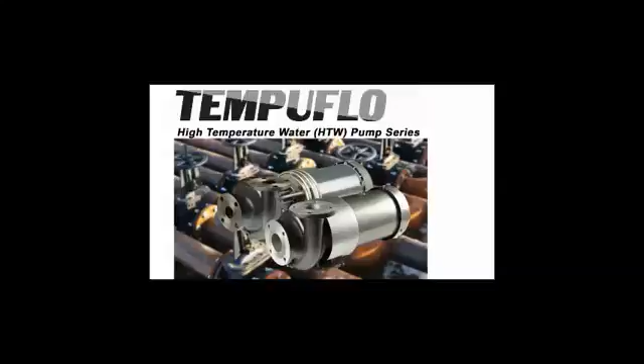The HTW was released by engineering in 2015, just recently. The pictures you see here are the first production run of the HTW pumps. The picture you see there on the left is without the shield. This is showing you the heat exchanger coil. This is the one major piece that makes the HTW possible. The picture on the left shows the HTW 80, and the picture on the right with the shield actually shows the HTW 300. These are, again, the first production run of this series of pumps, the HTW expanding the Tempuflo line.

This heater coil that we'll show in greater detail later is taking water from the sealed chamber and it is circulating it around the heater coil and back into the sealed chamber. We'll explain this in greater detail later, but I just wanted you to be aware of what you're seeing here.

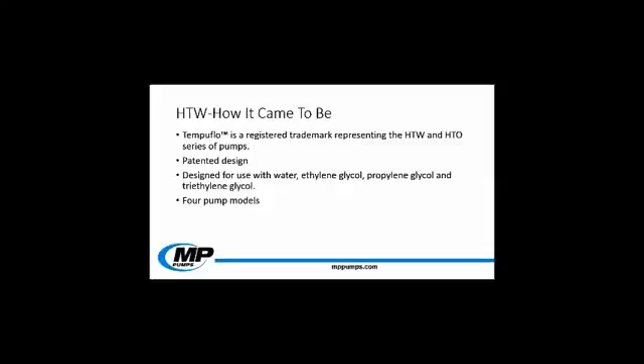The Tempuflo is a registered trademark. It is a name that we came up with here to describe our series of pumps, the HTW and the HTO line of pumps. The HTO, which you already are familiar with, the hot oil pumps, and the hot water pumps, the HTW pumps. Here at MP Pumps, we did patent this design. Several of the features, not only that heat exchanger coil that you've seen earlier, but several other design features inside this Tempuflo family have been patented.

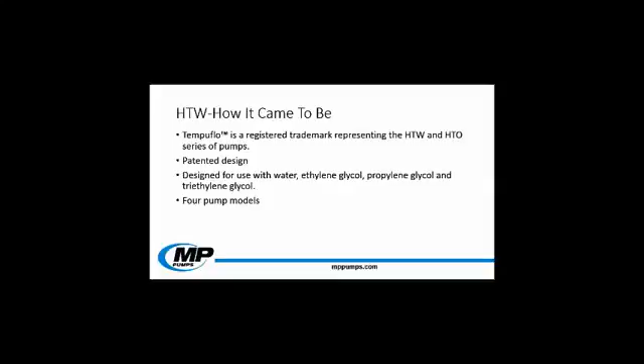Now, we don't want to limit the use for this pump, but specifically when we were designing this series of pumps, the HTW that is, we designed them for use with water, ethylene glycol, propylene glycol, and triethylene glycol. These pumps come in 4 different distinct models. The HTW comes in 80, 120, 180, and 300. The 80 and 120 both come in 2 different models: the NPT and the flat flange.

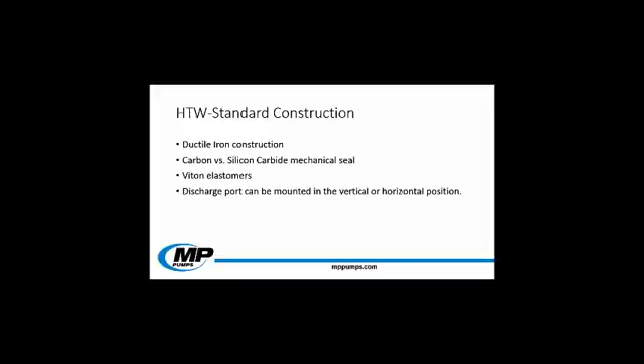This has a very durable design. It comes in the standard ductile iron construction. Also, it comes with our severe service seal. Our severe service seal has the materials of carbon and silicon carbide for the mechanical seal, and the O-ring seals are Viton elastomers. As always, you can change the orientation of the discharge on these pumps, from a vertical or a horizontal discharge position.

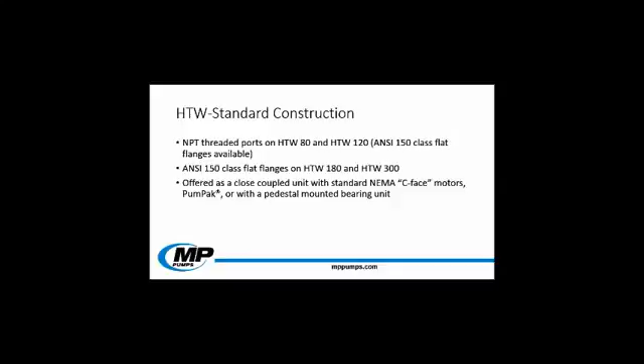The HTW line of pumps is self-aligning. It's self-aligning in that you don't have a long coupled design. The fact that it is close coupled gives you this self-aligning attribute. This is because of the close tolerances that are put onto the adapter and housing and impeller to allow it to be self-aligning. So with the long coupled unit, you'd have a bearing assembly and pump and electric motor that you'd have to align with a coupling. This close coupled design eliminates all of that.

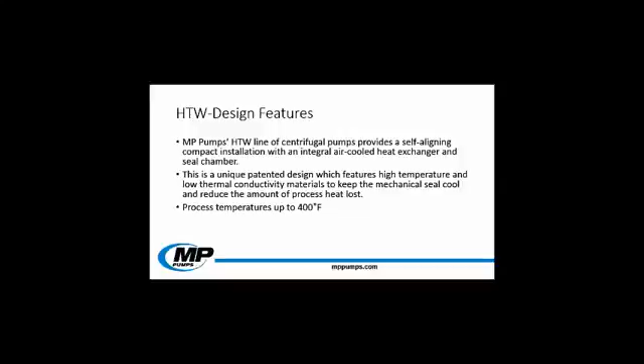This unique patented design, which features high temperature, low thermal conductivity materials, all of this combined with that heat exchanger coil is what reduces the amount of heat loss and keeps the bulk temperature in the main region of the circulation of the fluid that you're pumping and out of the seal chamber. With this series of pumps, we can process temperatures up to 400 degrees Fahrenheit.

But there's some other things that made the HTO line good as well. Like I talked about before, this is a close coupled design, meaning that the electric motor directly drives into the pump itself. And this is accomplished by these close tolerances on the adapter and the housing and all the other components that drive this concentricity.

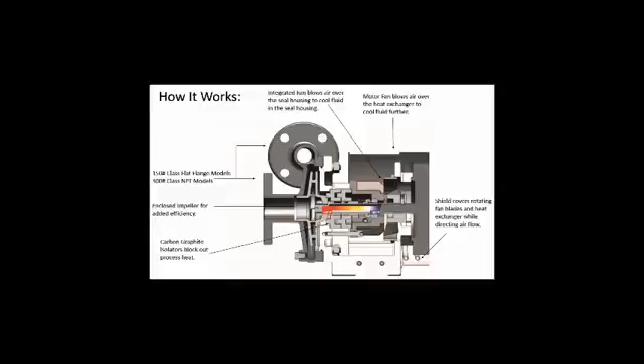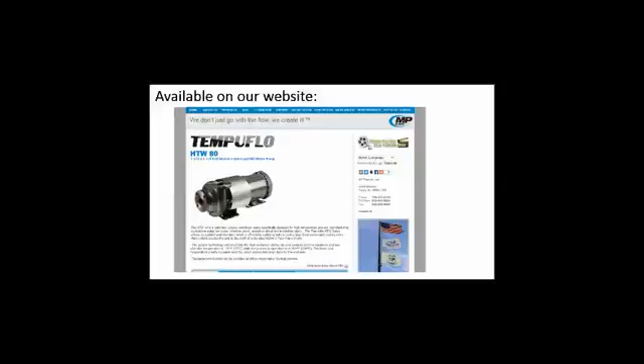You'll be able to see an exploded parts view of all the parts list in these series of pumps, and you'll be able to see all the information you need to know for this, as well as specs on the heat that it can take and anything else you need to see. If there's something you don't see here, please contact customer service and we'll be able to answer any questions that this does not answer.

This is an example of one of the things you can see on there, the installation print itself. This gives you the dimensions you need to hook this up to your system. We also offer 3D solid modeling for those that want to integrate a solid model into their 3D software for their assembly and for the designing of their system itself.

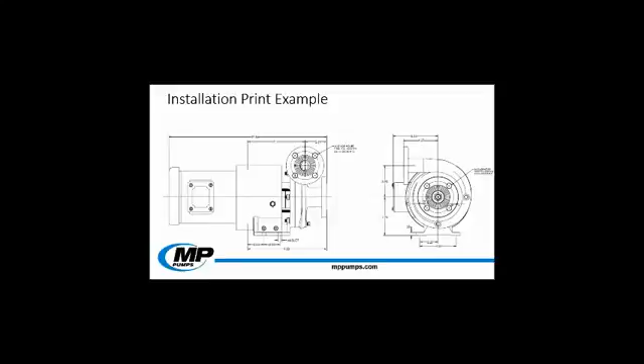What this curve is showing is all of the family of the HTW pumps. This is on a logarithmic scale, and so it goes up by a factor of 10. You can see here that it goes up from 1, 2, 3, 4, 5, 6, 7, 8, 9, 10, and so on by a factor of 10 every time. This was done so you could see all the family of pumps on one graph and keep it clean.

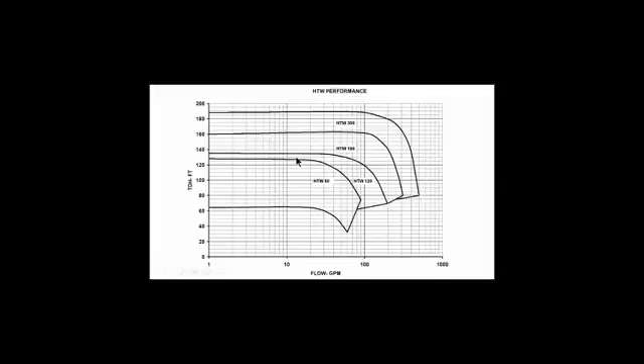This graph is used as a quick reference to see what pump best suits your need. This is flow on the bottom x-axis in gallons per minute, and pressure or total dynamic head on the y-axis. So once you establish where you need to be with your system, you can quickly figure out which pump best suits your needs.

This is a normal graph that you can see from a pump here. This is just one example. This is the HTW 180 pump, and the size is given in the top right as well. The HTW 180 has a 3-inch suction and a 1.5-inch discharge, and the impeller diameter is listed here as a 6.45-inch diameter.

Now this is a constant diameter curve, but it's what we call a multi-speed curve. When you lower the speed of the pump via a variable frequency drive, or if you have a 50 hertz application or a slower electric motor, this dramatically changes the pump performance, and that's what the multi-speed curve shows. As you change the speed, the pump performance will change.

As well as the last graph, this is still gallons per minute on the bottom and total dynamic head on the left. And the metric conversions are on the opposite sides. What this is showing, these curves are rather busy, but they're showing you pump performance on these curved lines. These curved lines that are going in this direction are the efficiency lines, and the constant horsepower lines are going in this direction diagonally. The opposite diagonal lines are your net positive suction head required lines.

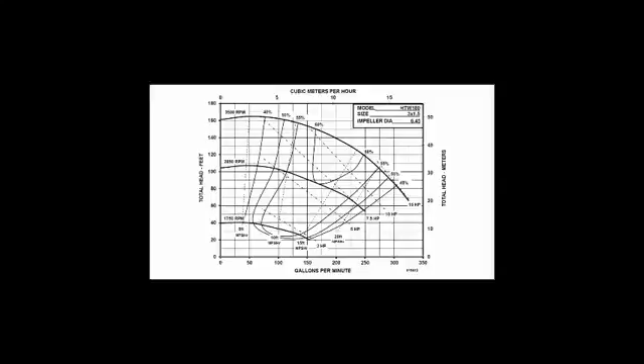This is just one example of a pump curve. We have pump curves for every model that we've seen before. What this curve is showing is the performance you can expect from our system from taking the bulk temperature into our seal cavity temperature. The bulk temperature, or the temperature that you'll be pumping in your system, is listed on the x-axis on the bottom in degrees Fahrenheit.

The y-axis, on the other hand, is what you would expect to see if you had a temperature gauge in the seal chamber itself of the seal temperature in degrees Fahrenheit as well. So for a given bulk temperature, what is the range I can expect to see depending upon factors of what my seal temperature will actually see.

And this range is based upon all of the HTW pumps, and they all have slightly different seal temperature performances at a given bulk temperature, and that's why you can see the range here, as well as varying performances as well. But this range shows that seal temperature versus bulk temperature.

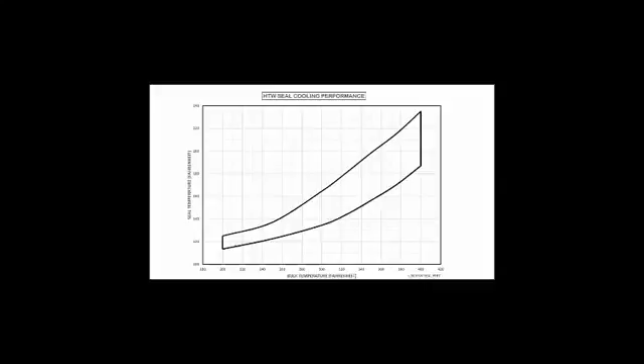What this is showing is the overall limitations of our HTW pumps. How high in temperature can you go, and how high of pressure can you go? On the x-axis we're showing temperature in degrees Fahrenheit, and this is the bulk temperature of your system, not the seal cavity temperature. And what can the bulk pressure be as well?

Each mechanical seal, depending on its size, has a limitation of maximum pressure that it can handle. The smallest seal can take the greatest amount of pressure due to its surface size. So the HTW 80 actually has the highest pressure rating at a given temperature that it can accept. So this is showing you the NPT version of 80. This is the 120 NPT, but this one curve, this dotted line, represents 80 and 120 for the HTW with the flat flange. And the flat flange is only offered in the 180 and 300, and that's the line you see here.

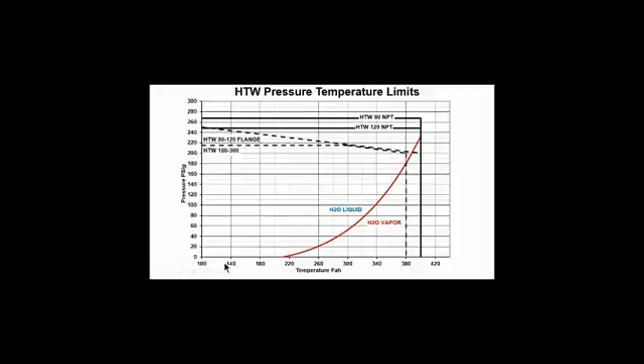This is just a quick chart, and it's a great chart. You will be able to have this available as well for you guys. This is just a quick reference chart, and what this is showing you is what are the general sizes that you can expect for each pump design, giving you the suction and discharge size, and then the size of the impeller itself. So you have the suction and discharge, and then the impeller, and what they're offered in as far as flange design on the housing.

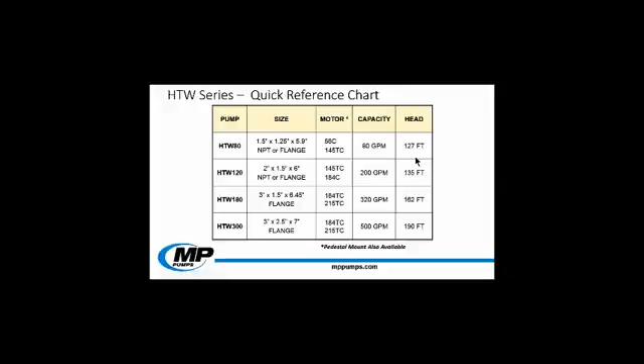Also, what electric motors can be hooked up to these pumps. And this helps especially when you're buying a pump pack design, and if you already have an electric motor on your shelf, this will aid in which pump will be able to hook up to that electric motor. And it also shows you the maximum capacity in gallons per minute and the feet of total dynamic head that you can expect out of each design.

Now, what are some of the benefits that you can expect from the HTW line of pumps? Like we said before, this has all the benefits that you're used to seeing with the HTO pumps. But with the heat exchanger added, this reduces the seal housing temperature to increase mechanical seal life. The cooler we can keep our mechanical seal, the longer it will last. And all these things combined, we've seen anywhere from a 60 to 80 degree change with the heater coil added.

We did a test where we actually valved off the heat exchanger while we were running and allowed it to maintain an equilibrium temperature. And then we turned it back on and allowed it to maintain an equilibrium temperature again. And this is how we've seen how effective this heater coil really was, because it really showed us, with and without flow through there, how effective we were with just the addition of the heat exchanger coil.

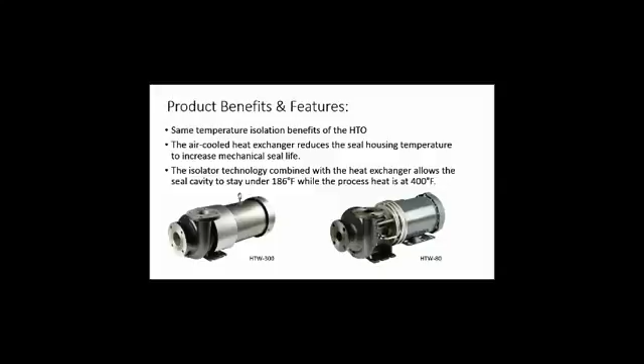So with this isolator technology combined with the heat exchanger, the seal cavity can stay under 186 degrees Fahrenheit while the process heat is at 400 degrees Fahrenheit in the bulk temperature. What these two pictures are showing again is the HTW 300 and the HTW 80, the first production models that we've created.

Now, what's the difference? What's setting us apart from the competition? The HTW pump is going to save you in water cooling cost. A lot of competitors' designs will actually have an external seal flush. This external seal flush is adding extra and unnecessary parts to your system, and that extra water going through your system could lead to calcification in your plumbing itself. All these cooling water costs, plus the bill of having the extra water being pumped through the system, are all eliminated with the HTW design.

This is an efficient design with the enclosed impeller and everything being close coupled. It is a very efficient pump, and so this will mean less energy costs for the consumer as well.

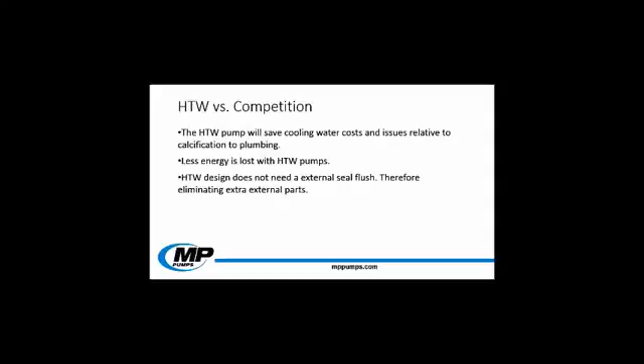Another benefit of having this close coupled to the electric motor is that it does not need an internal bearing. The internal bearing is needed by some of the competitors because of how long their overall system is, and they need to hold up the opposite end of the impeller. The HTW design is a very compact design and does not require this additional bearing, and therefore is one less part in the system to fail. And so this is a very efficient design as far as floor space and the elimination of the extra wet bearing in the competitor's design.

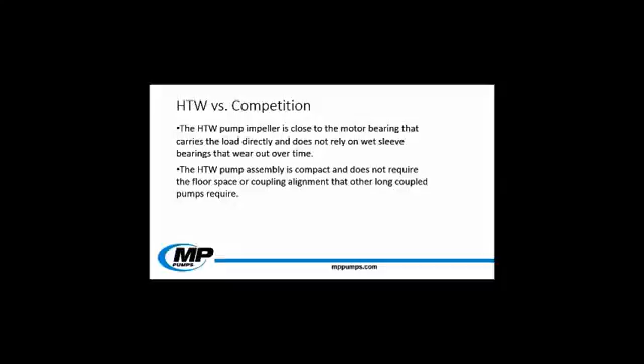Now, what are some of the applications for the HTW? The HTW can be used in various different applications. Why would you use water or some form of water with the HTW? Water itself, as you know, is extremely good at transferring energy. Its thermal conductivity is very high. When added with other additives, it goes down, but it can be up to 4 times the thermal conductivity of standard heat transfer fluids, and it is very efficient at transferring heat across the system.

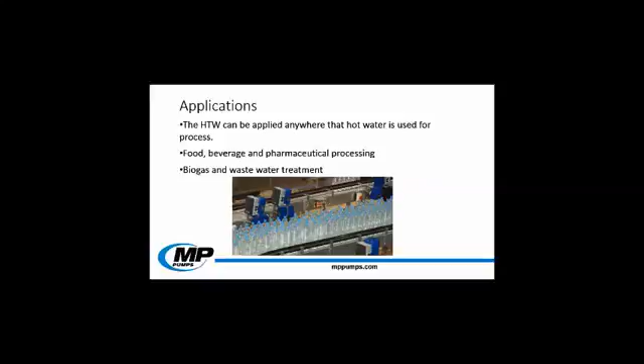What are some of the applications, though, that this can be placed in? Well, once again, we don't want to limit what this can be put into, but just to give you some ideas, anywhere that hot water is used for transferring energy. This could be anywhere water is required, like in the food and beverage industry or pharmaceutical processing, biogas and wastewater treatment. There are some instances where you cannot use an oil that could contaminate their system, and you must use something safe. And these applications would require an HTW design.

Places that would use this would be hospitals, universities, prisons, and healthcare facilities that transfer energy with water. Chemical processing, commercial laundry and heating use this type of system. Like I said, anywhere that uses energy conversion, where you take a fluid and you're transferring heat across the system, this is a great pump and a very robust design for these applications.

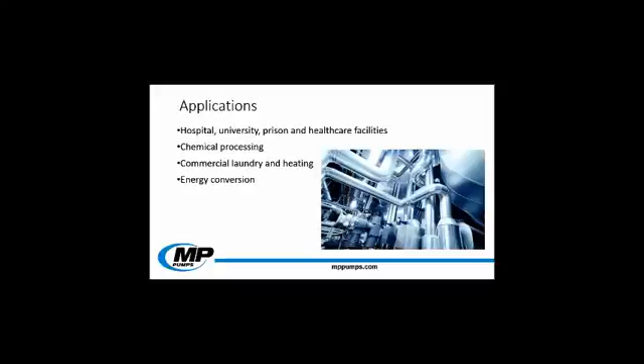If you have any other inquiries, or if something is not quite fitting your needs, contact customer service and they will be able to supply you with either a new part number or the part number that already exists that fits your needs.